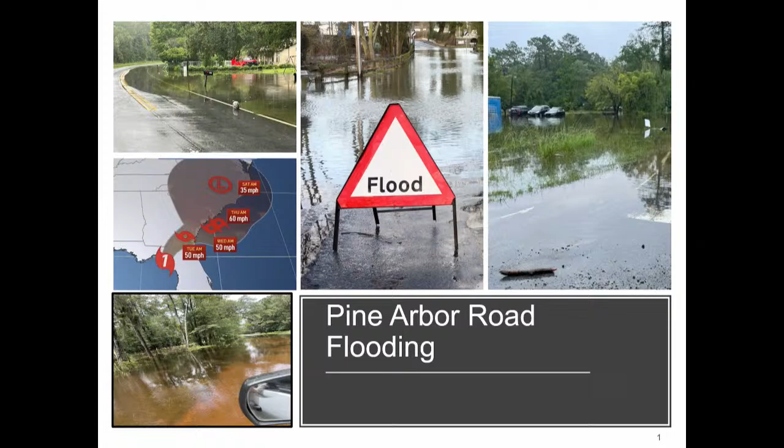So let's move on. Some key points here: already mentioned Tropical Storm Debby. About 1.3 miles of Pine Arbor Road was affected. We see about 3 different areas of concern that we're going to really start focusing in on. You can see what we found as far as how much rain actually fell over 4 days. It says 12 inches, but most of that fell the first night, about 9 inches of rain. If you look at NOAA's information there, that range right there gives you about a 24-hour storm, a 100-year storm over 24 hours, and so we're right in that, maybe a little bit less. So somewhere between a 50 and 100-year storm, I think, is what we experienced.

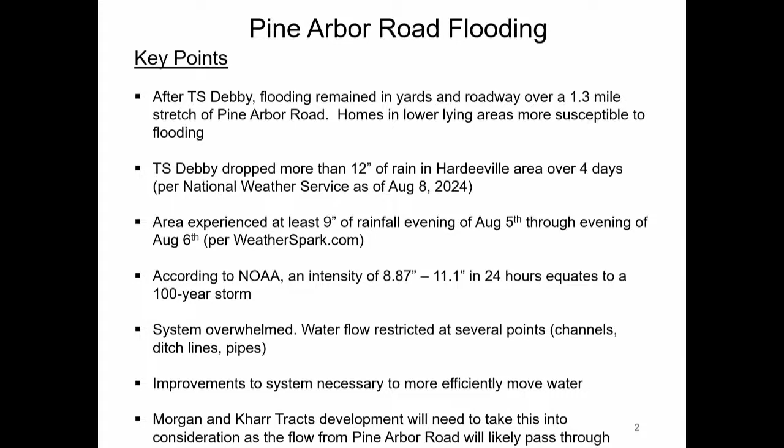System's overwhelmed out there, obviously overwhelmed. Water flow restricted in different areas. Improvements are definitely necessary. And the Morgan tract as well as the Kharr tract development are going to need to consider this as they move forward with their developments as well. Please stop me if any questions come up.

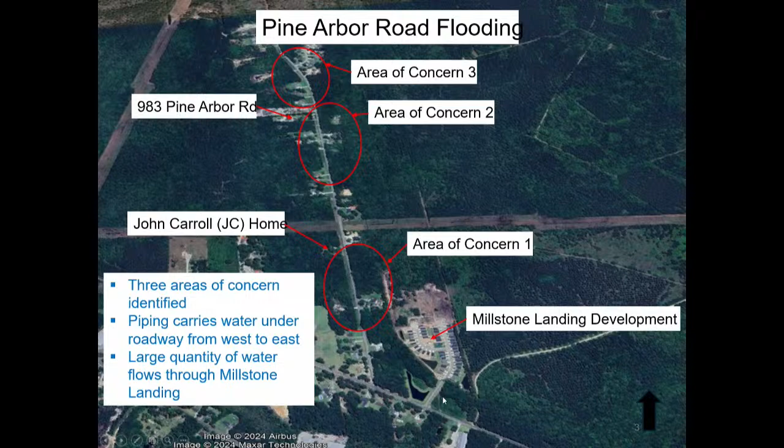All right, so again, we mentioned 3 areas of concern. I've got them listed out here for you. I've got 2 points of reference. One is John Carroll's house. From this point on, it'll be JC Home, and the other one is the Coolers residence, 983 Pine Arbor Road. By the way, I had a really good conversation with Ms. Cooler, but as we were getting all this pulled together, she gave me some really good information, and so I do appreciate that, and we're going to stay in touch with her, that family, as we move forward. I'm also showing the Millstone Landing development here, and that's going to come into play here in just a second.

All right, so let's look at Area 1. Again, JC's home, you see where that's located. You see Millstone Landing. What I've got here now is a choke point. I call out a choke point, which is right here. It's the entrance road moving into the Millstone Landing area. We're going to talk a little bit more about that here in a second. I've got 2 large X's here. These are the highest elevation points around. It creates a trough where water flows between the 2, right straight down to the choke point.

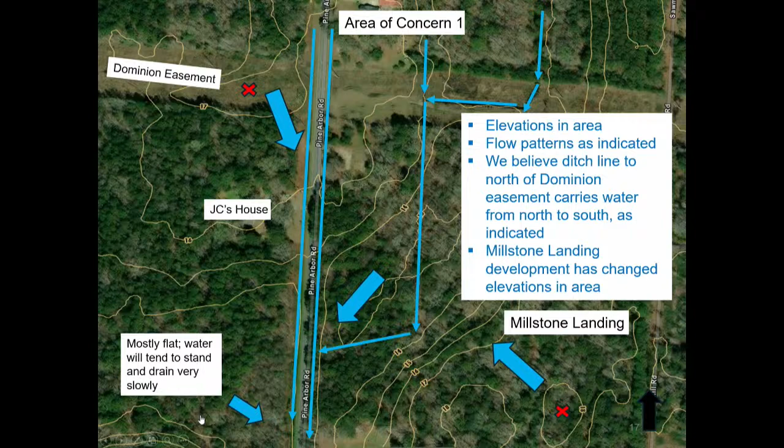I'm going to click to another slide real quick. This gives you a little bit more in-depth information on the flow. So the large blue arrows basically show the general flow of water in the area, stormwater flow. The smaller, thinner blue arrows indicate channel flow as far as the ditches down the roadway. And you can see other areas if you look up in here, there are ditches that are bringing water from the north to south, that go through that choke point.

So if I go back to this one here, again, that choke point is going to be vital, this right here, as we move forward in this brief. Oop, hang on. Move on there. I don't get to go to the next slide. I've got this link.

Because if I hit it right now, it will actually link to that slide I was just on. I needed to forward to the next slide. Can you just hit the arrow there for me? Okay, great. Thank you very much.

This brings it into more of a technical picture of the same area. Again, you see JC's home just above off the slide there.

What I'm showing here is there's the first of four 30-inch pipes that take water across Pine Arbor Road from west to east. This is the first one. It's picking up a lot of water on the west side of Pine Arbor, and it's moving it to the east, and it's also being joined by all this water up here that's coming down.

It comes down into this one ditch line right here. It literally makes a dog leg, 90 degree, and then it starts to meander down through this area into the choke point. What I show here is the choke point.

Three large 36-inch pipes that Millstone Landing put in. If you look at the numbers there, that's about roughly 21 square feet. That's what we're getting for flow that's going through that area. And again, a lot of flow is coming through this area.

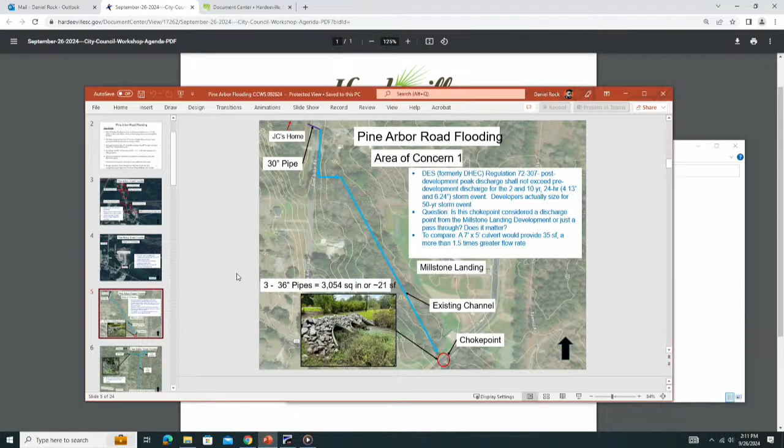Gonna bring the slide deck back up. But the water did go above the pipes, it did, but it did not go over the road itself. It was close, it didn't go over the road. It looks like even beyond those pipes it was up pretty high, flowing out on either side.

And this was just a tropical storm, right? It wasn't the hurricane, this was hurricane force. We didn't get the wind, we got the water. Is this considered a 100-year storm or 50?

I'll bring this back to you in a second. 100-year storms don't happen in every case. Was this considered a 100 or 50-year storm?

So again, if you look at the actual inches of rain over 24 hours that we got, what we can figure out is about 9 inches of rain. Typically for this area, if you look at NOAA, the average is about 10.1, but there's a range from 8.87 inches to 11.1 inches. Over 24 hours, that intensity would be considered a 100-year storm.

Yes, but we're at 9, so we're barely in that. So depending if the data is correct or not, it could be 50, it could be 100, but I'm saying it's 100. So that was considered about a 100-year storm? I think so, yes. And that was just a tropical storm, not a hurricane.

It was a tropical storm that sat on top of us. It didn't move, it sat on top of us. If it would have moved, I don't think we would have seen near the amount of rain that we actually got.

As far as when a developer comes in with their plans, they're scrutinized to make sure that is indeed happening. So these are based on theories from when? How old is all this information? Is it current or old and antiquated? No, this information is from myself and my team actually out there observing this.

No, we're out there observing what's going on right now. This choke point right here is fairly new. I don't know exactly what year it was built, but it's fairly new, within the last couple of years. I think it was 2019 when the plans actually got approved for phase 1, but as far as getting it actually constructed, I think it's been more recent than that.

Going back on what she was saying, the three pipes you're talking about, is that the city's responsibility to add another pipe, or make it bigger? Whose responsibility is that? That's the developer's, that's on Millstone Landing's property. We approved it, the city approved them to put that in there. That's part of the SRC process, is to approve that, right?

Now, could we go back to the developer and say, hey, we might like to talk to you about this, might need to take a look at it, because now we have the data from Debby that says maybe we need to look at this. But I don't know, since it didn't overflow the road, whether they would be agreeable on that. That's something we need to look at, but it's kind of a recommendation I'm making toward the end of the brief here.

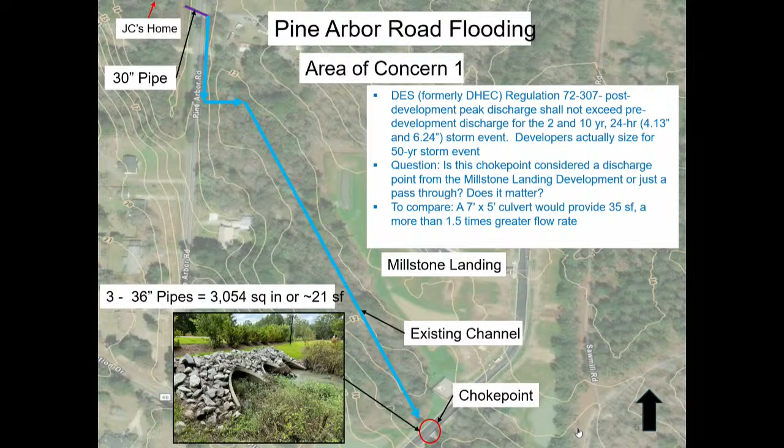Did their retention pond or any of that overflow with this? I did not see any of their retention ponds overflow. They got very high, I know one got high, but I never saw it overflow. The thing is, the way they've designed it, if they do overflow, they will overflow into this flow we're talking about right now.

And that could then create an issue where it's going over the road. Does that make sense, John? Yeah. As future development comes along on Pine Arbor, yes, developers are required through SRC to take care of their own stormwater, but there's always a percentage of it that's going to increase these flows, like this one here coming across Millstone Landing's property. What will happen if the day comes when those three pipes cannot handle the flow?

That's an interesting question. Let's back that up. Let's say upstream of that choke point there's another development, let's say Morgan or Kharr, actually downstream of that. Maybe they're adding something to this. It's up to Morgan to understand what the downstream effect would be by them adding something to it, and then they have to design their development to adjust for that.

To be honest, until I saw this handout stuff, I never thought about the Morgan tract, even though I should have, how it can affect this. I thought of it because talking to Ms. Cooler, John and I met with her, and John subsequently met with her again, and you've heard it over and over, people saying the developments, even from Margaritaville, are affecting this area, not only here but entirely through downtown. I'd have to rely on John what that effect is, but if that's true to any extent, Morgan's just going to add to that situation.

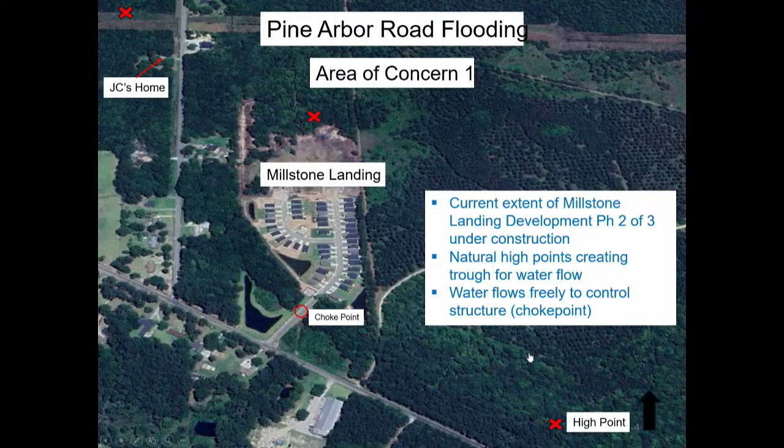I guess my point is Millstone Landing is approved for 600 homes, and right now what's there, a couple dozen? They haven't been engineered - just that first section has been engineered. We haven't moved past that wetland to the next area.

My only point is, as they continue to get built to that 600 home mark, it's going to continue to bring more impervious surfaces. But again, they have to control that - that developer can't release that off their site. Each section, every phase, they have to control it.

All right, let me move on. So we were here, this was the section we were just talking about. This is the southern portion of area of concern two. The large arrows show the general flow, the smaller, skinnier arrows show the channel flow. We also have the Buford Jasper pump station that sits right here. Outside of that, there's really not much in that area, so I'm going to advance on from there.

John made a point - it was overwhelmed and there were several houses on Buford Jasper that could not use their facility, it was overwhelmed. They couldn't control it either, and it's actually built up off the ground.

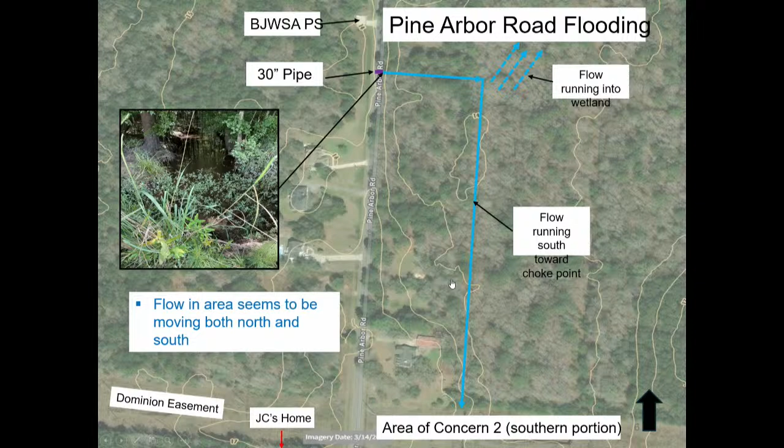Actually, if I could, can you play that other video for me?

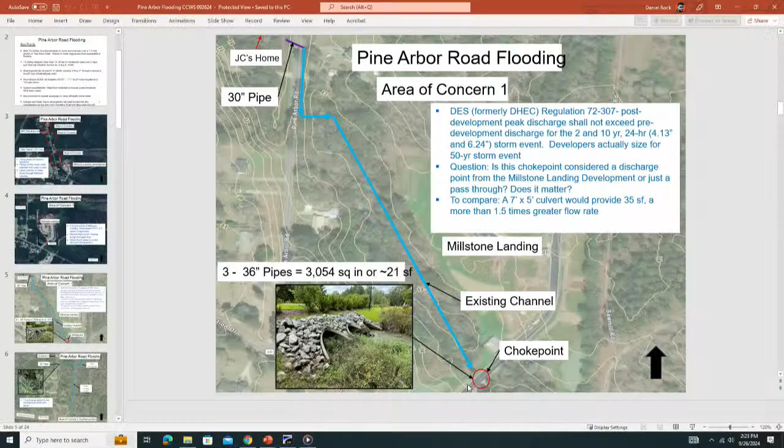This cooler provided a pretty good video showing what it looked like coming out of their driveway. That's looking south right there, and that's their yard. Then they drive all the way down showing you the flood.

Now, this should all be going into those ditches across Pine Arbor and then down towards the choke point. That's where this should be going. Look at this.

I'm going to talk about that in a second. Again, that's the worst I've ever seen it. But I've seen it before, up to these houses too. This isn't the first time it's been up to the doors. The house right before the pump station, I think, got hit the worst, because there's the pump station right there.

All right, you can stop it there. Let me get that back from you so I can do the link thing. Yeah, those homes, even with a lot less rain, it's been hit a couple of, two or three times.

All right, so as we continue on, again, the red circles show where the houses were at, and they really suffered. So as we move on from here, what we're seeing too is this very large house sitting just to the north of where the coolers live. There's some development happening back here. I don't know exactly what it is because I haven't been able to get back there, but we think it might be affecting some flow.

If you look at this slide, you'll see where 983 PAR is located right here, and here's that big house. This natural flow channel, I think, is getting affected by something going on here. I can't figure it out yet, but that's supposed to pick up water and take it out of the area. This slide also shows you where the wetlands sit in that general area, that's the lighter green you can see there. And then down below, you can see where the choke point's at right here.

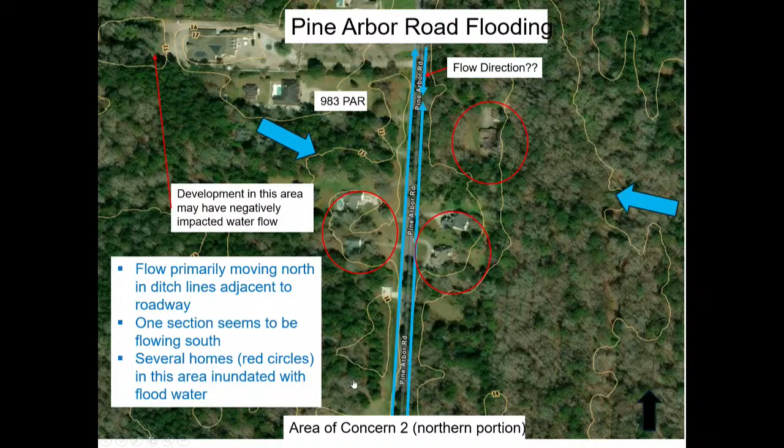Brenda, is that our friend that we've had? Yes, I believe so from what I can tell, and it's hard for me to tell. We're gonna keep moving on this. I'm gonna go to the next slide, which is gonna stay in the same general area.

Now, here's where we're talking about, you see 983 Par, which is the cooler's house. Right in front of them is another, this is the third pipe that takes water from west to east. Here is a big issue. Here's the inlet to that pipe. I can't even see the end of the pipe.

All right, so we're gonna have to do some work on that. We're gonna have to talk to those folks out there as to how they can help us keep their ditch lines clear, because I think what's happening is we might have landscape work going on out there, and a lot of that's getting pushed into the ditch lines, and that eventually is gonna cause it to clog.

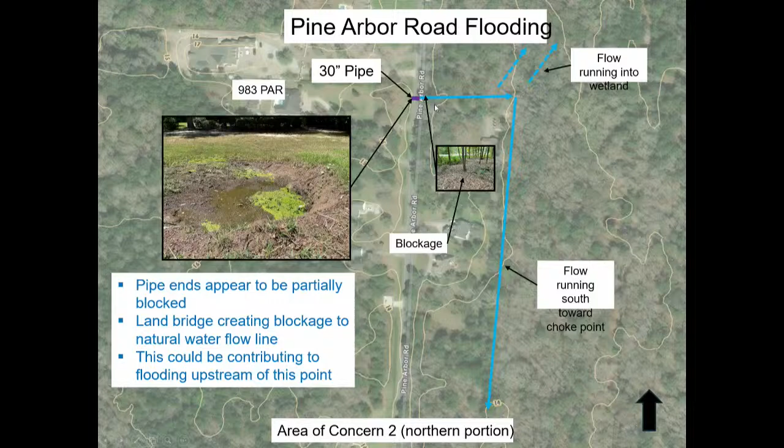On the other side of the road, on the east side, this house actually built what I'm calling a land bridge. It's like a diversion, so that he didn't want water coming across the road and into his yard. It should flow freely down this ditch line and then south down this ditch line. But since there was something built here, it's diverting flow to the north, and that's what I'm going to show you on this next slide.

Here's a closer up picture of that. Here's the pipe I just discussed with you, and there's another pipe right there I'll talk about in a second. But this 30-inch pipe should be picking up water, comes across, it's hitting this man-made dam, this diversion, and it's wanting to go north, okay.

Instead of it going its natural flow pattern past this house and then south from that house, it's actually diverting it north. I think that is a huge problem that we're having because it's not allowing the water to flow in the way it wants to flow. Water wants to flow downhill, it wants to flow its natural path.

What we're having here is the water's coming through, it's going north, and then it's competing against another flow. I think that is a huge blockage that we're having, and that's where my folks are gonna start taking a look at that, is how we can do some work.

Now, on the 9th of September, I went out there and I stood on that second pipe. I stood on this pipe right here, and I looked south. This is what I saw. I turned around and looked north, that's what I saw.

You can see a clear difference. Water's not flowing there. There's a reason for that. Something's blocking those pipes up.

Is that land bridge on public right of way? It is not, I believe. That's a great question, because you gotta think, if we put a pipe here and there's a ditch there, that should be right of way that the city owns. That's what you would think. That's what I'm thinking. That should be, and we should be able to get out there and remove that. I think we should do that anyway, to say, hey, we need this water to flow the way it's supposed to flow.

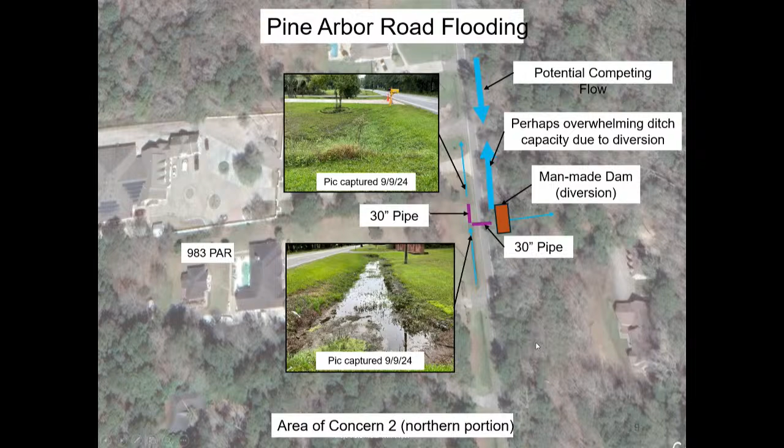As we move on, we're up to the fourth pipe that takes water from the west to the east. That's this one right here. This is up at the Heritage Place community, right up the road a little ways. This isn't so much a problem in itself because this is kind of high land, so water's running off of this towards the north and the south. But water that does flow across Pine Arbor, it's in the channel, then goes into some underground piping, back into a channel, into this retention pond. This retention pond's built so that when it fills to capacity, there's a weir that allows water to flow out of that, and that water flows down south.

Where does that water go? Choke point, right? So the point I'm trying to make is there's a lot of flow coming south to that choke point. And as these new developments come out, they're gonna have to take a look at that and see what can be done.

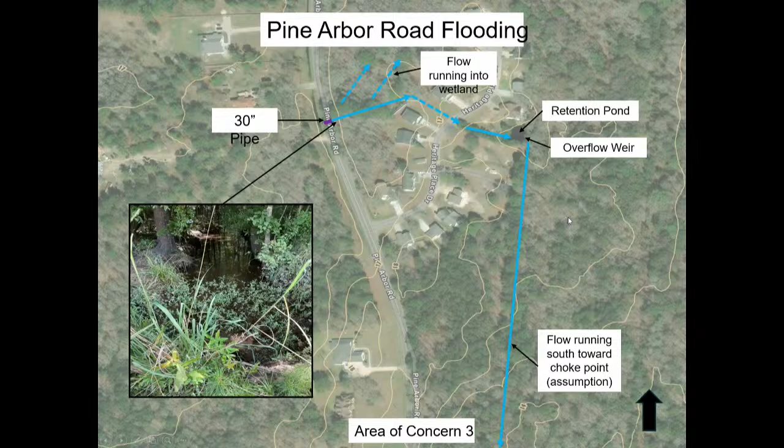So with all these developments coming up in the area, and we're noticing because of the impervious surfaces that those developments are creating, why can't we up the ante on them and have things change where it's improved instead of us leaving it the way it is right now? Can we do that?

May I? Yeah, absolutely. One of the things is, like that situation where the man-made dam was, that's not in a development. That's some homeowner that just decided to do that, to block off.

Yeah, no, I'm not talking about that. I'm talking about developments in general. We have to, instead of it going, okay, three of those are going to be okay over here, think of the future going forward, they say less is more. I am always a more-is-better kind of person. So can we not have them do something better than what they are doing now? Because that's what we expect, to do much better than what has been done.

Our ordinances—most of this development out here, like Heritage Place and all that, came in well before our regulations. It was before I was here. So with what's happening now, I don't know all the engineering words or details, but I know Millstone, by putting those pipes in, we're doing exactly what they should have done. And you need to figure out the choke point, how water's getting down to it, if I'm understanding correctly.

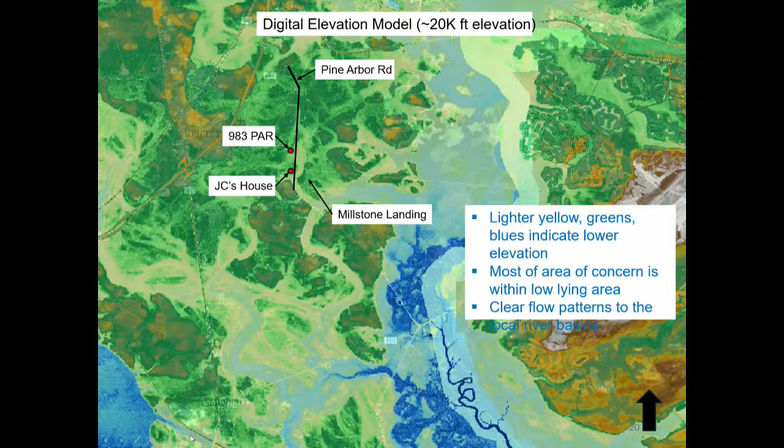Here's a few recommendations that we came up with, short term, say six months. This is us, Public Works Department getting out there, clearing the excess vegetation, pipes at all the crossings that we have out there. Clear the identified blockages, that's that dam I'm talking about, that we need to get out there and talk to those owners and say, hey, we're gonna be coming on your land, perhaps, taking care of this. And then educating the residents. I think there is an opportunity to educate residents on how to help us keep those ditch lines clear.

All right, looking out, say, to 18 months, check and correct the drainage elevations. I think we have some issues because I'm seeing competing flows out there in a ditch line where two flows are coming head to head. That's not helping us. We need them to flow in the right directions.

Install additional piping perhaps under the roadway to help move more water. And then looking out past that, construct new channels. I'm gonna talk about that here in a second. Replace some piping and make it into a box culvert, if you will, if that's what our engineers say needs to happen. So any questions on that? John,

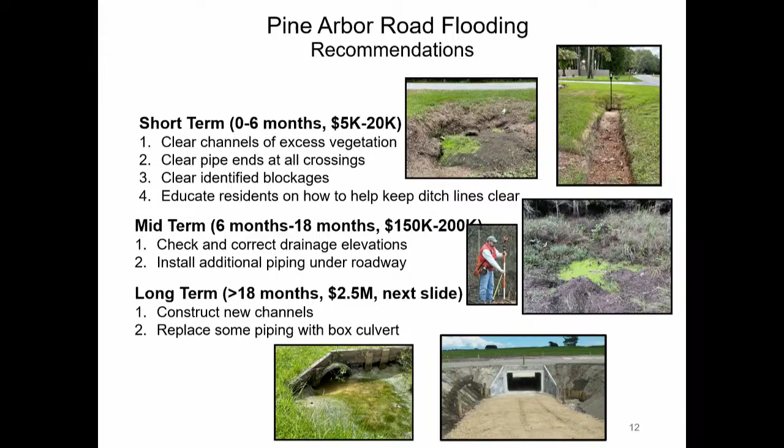If we, cost aside, because we don't know what that would be, but if we outsource this, could we accelerate these timetables? Perhaps, absolutely. Absolutely, but let me show you the next slide, which talks about maybe outsourcing. Well, we would have to outsource it, but the next slide, where is my? There we go. Oop, didn't want to do that. Next slide.

Thomas and Hutton was hired to do a comprehensive stormwater plan for us. Let's take a look at that. This is literally one that came right out of that plan, Pine Arbor Road. Again, you can see JC's house. So this is now not north-south, it's more west to east here, the way we're looking at this.

Thomas and Hutton had a great idea: let's build a new channel. And now here, let's replace this pipe right here, which was the first pipe we talked about, with a culvert for increased flow. The issue with that is, if you look down at the bottom right, it's $1.7 million for that project.

Now, two years ago, how much is it now? More than two million probably, likely, to do that same type of work. So it's not that things haven't already been thought through to say, how can we make this work a little bit better? Now it comes down to, what do we want to do, and are we truly committed to put the money towards it to get it done?

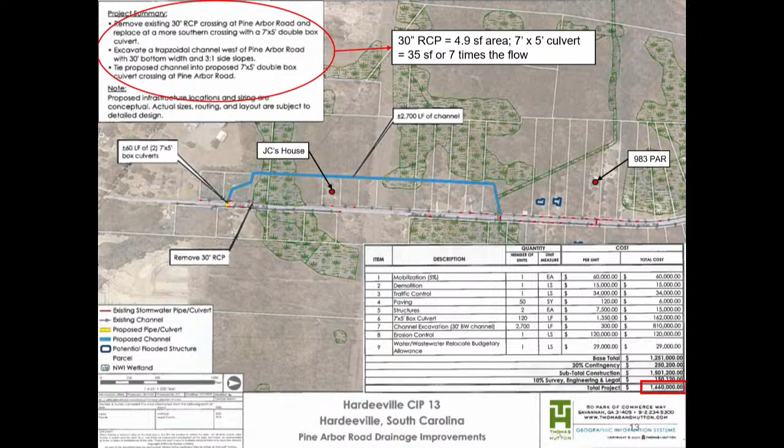There's some backup slides I don't need to go to, unless there's any more conversation you want to have, but that's where we're at right now. So it would seem to be one of the short-term solutions.

Easing things is get code enforcement to blow up that dam. Just burn it. Burn it. Or either we're gonna get our new piece of equipment. I'll take the pictures as you do. Our new excavator, we'll take care of it.

First thing is to find out if we have a legal foot to stand on. I want to push the... well, we can look and see exactly where it is. There are some houses out in the county. Is that one in the county? No, that's actually in the city. Yeah, there's only two along this whole stretch that are actually in the county. Do some investigation, who owns that? I don't know. In all seriousness, it's happening. Say, Mr. So-and-so, tear down that wall.

Nathan, excuse me, I want to try to help out a little bit. We haven't fully vetted this application to see what the zoning districts allow, because what we will be asking from you is a straight zoning district. So we have to see exactly what the ordinance says and play out how, but the staff has not fully reviewed all of this at this point. So I just want to let you know that before you get into all the details of the parking.

Okay, yes, thank you. Because my question, I really believe, is valid. I mean, you have 13, 14 offices here. Parking is going to be a problem. Unless only one person is in those offices, and then you have the residential, parking is going to be an issue no matter what, and you're gonna have to address it. You're absolutely going to have to address it.

Your office spaces that you're looking into, what are we talking? Insurance people, what are we talking? No, these are nonprofits and federal and state agencies geared toward low-income residents, so it can be a one-stop shop where they can come to one place and access all the agencies to help with low-income housing needs.

Well, that's great, but those people aren't gonna walk there. And this is why parking has to be addressed. We're debating with all the parking in that whole area down there around the hub, and unless we can address this, we're just gonna shove parking from one place to the other. We see it now, parking at the library when something's going on over at the Mission. We have to address it.

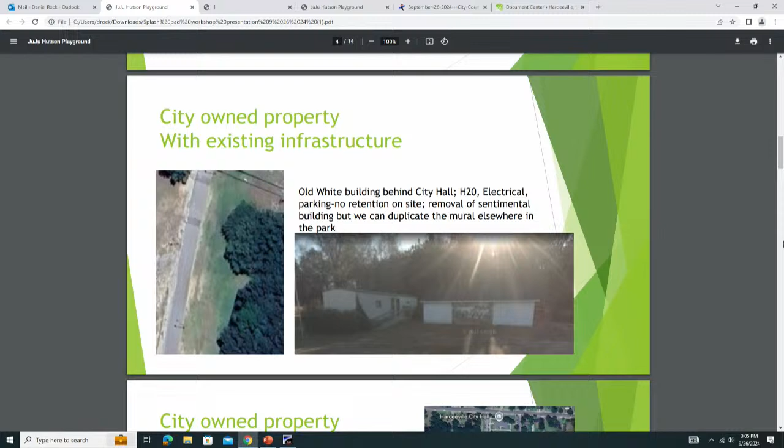This is where all of our playground stuff is, which we're getting ready to finish up. I know Jody's working on all that right now as we speak to finish up the Juju Playground Park and getting all that done. The one thing we have a problem with down here, JB was just talking about, is all that infrastructure issues with BJWSA.

We do have retention ponds out here again, but there are different areas that are already spoken for. The parking lot, Juju, is already done. We're literally going to be putting that out, getting it done hopefully within the next few weeks and get that contract signed. And then we're adding the parking.

I would honestly say that anyone who has been here for the last couple of years understands and knows, it's been out to the complex to see - parking is a huge issue. They'll park any which way. So we are addressing those needs.

And we do have the parking lot improvements, which also includes part of Randall Street on the other side. So we're taking care of all that stuff.

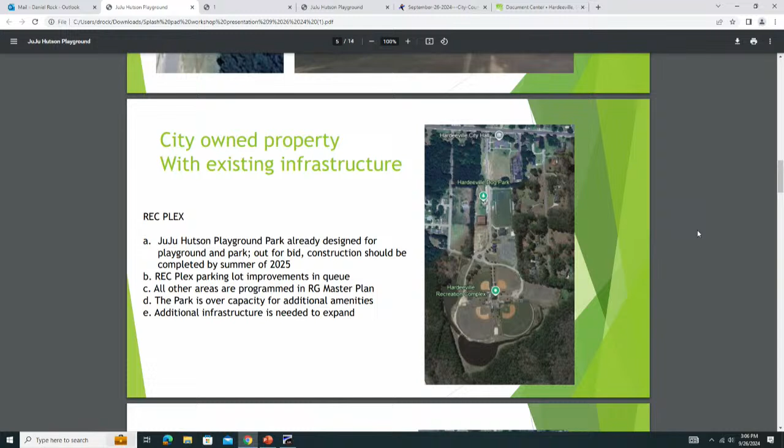In a perfect world, it would be great to add it. We just don't know where we'd be able to put it without taking something that we already have in the queue that's already master planned and literally out for bid.

So this is inside of the complex, just kind of on the outside - we don't think about it. This is again city-owned property without any existing infrastructure. This is the old dog park. This is actually where the playground used to be many, many, many moons ago. And people still use it.

It's a beautiful area. We will have parking, it's going to be across the street, right at the Randall lot that the city purchased a while ago. And we do have a detention and retention pond that is out there. But again, we don't have access to everything else without additional costs to connect into BJWSA and electrical and so on.

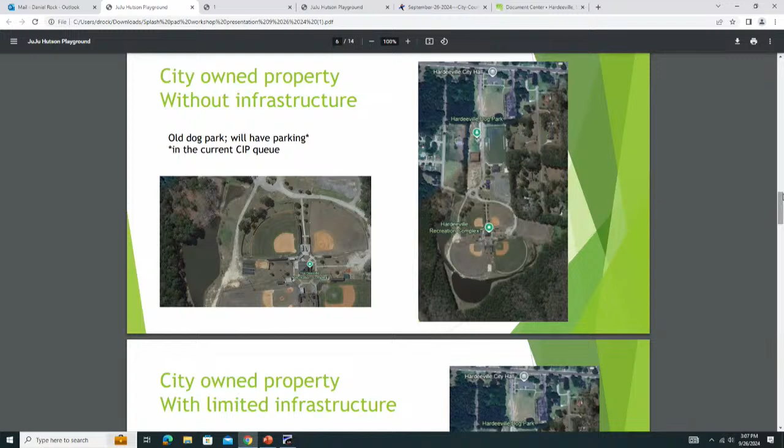And then we kind of come down here, same thing. This is the old JuJu Hutson Old Homestead, which is literally - let's see, yeah, I'm gonna do that one. This one's not going to work either.

But anyway, it's literally right up at the corner, and I don't know which clicker it is, I'm not used to using that one, sorry. But it is this little lot that's right here. So it's a pretty small lot.

Again, we will have some additional parking, but we also were concerned with what's going on behind City Hall in the future. There are plans to put in an annex, which is where we have our festival and all that kind of stuff, so a lot of that will have to be moved. We'll have to find another area to do that once the annex goes in. And I'm assuming probably the majority of that is going to turn into some parking at some point, because all of you here right now, whether you're staff or not, there's nowhere to park.

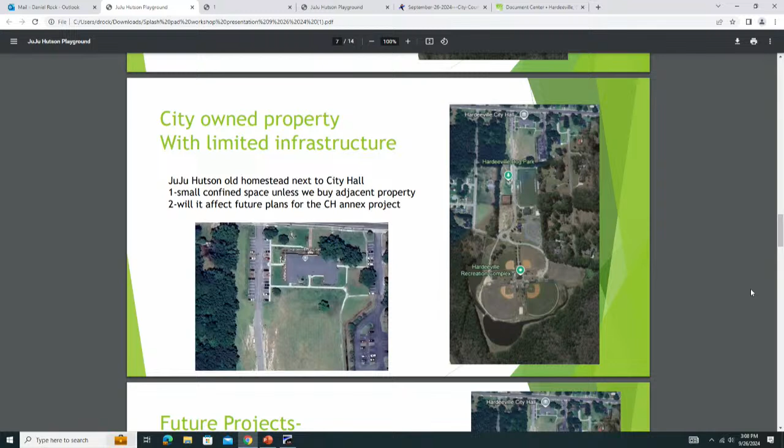So that is another area that we looked at. And then again, moving down, we looked at a lot of the future projects.

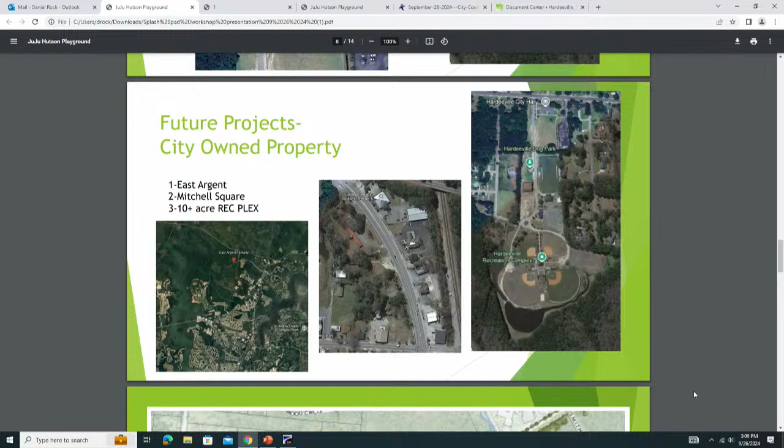City-owned property, of course, we looked at East Argent. East Argent is a wonderful area, but our directive was to try and find something now that we could use. East Argent could be another year and a half, maybe 2 before the road is finally finished. Mitchell Square, the city just acquired that property, but again, future plans are in the works for that. And then we also have our 10+ acre property right along I-95, over where the old dog park was. A lot of people don't even think about it, but it is there. There's just no way to get back there at this point without adding a hefty bill for some roads and stuff to get back there.

So, this is just kind of a quick synopsis, because most people would say this is probably the best place to put it. But again, I guess this is a hard pass for me, but it's up to council.

One of the things that Parks and Recreation wants to do, and the city, we're growing in leaps and bounds, and we want to be able to expand. I always joke with council, we have one playground, 57 square miles, one playground, which means everybody is using this park, and we're not expanding our parks to other areas so that people can get access to it. So, this is what we own. This is the land that we own.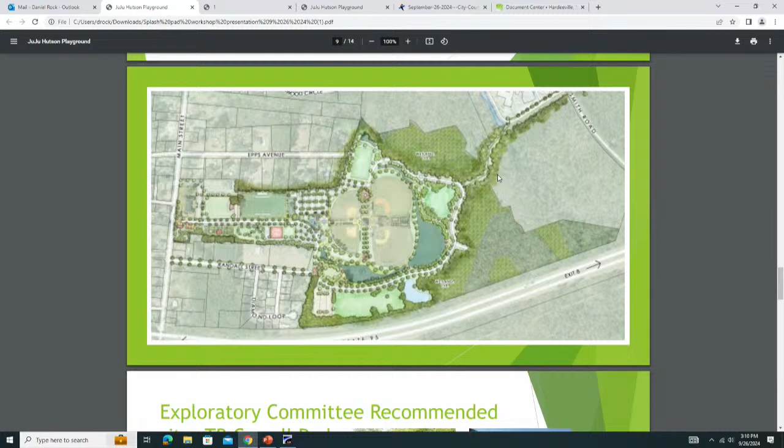And then after a lot of going back and forth, this is what we recommended. We recommended TB Carroll Park. TB Carroll Park is literally centrally located inside the city. It definitely needs an upgrade. We looked at the train, trying to figure out all the different kinds of things and elements that we could tie into it. We've got the hub that's going to be going in there as well. There will be Veterans Park, not on this side, but on the opposite side. So you've got a lot of different things to bring people to this area.

And then the general cost, again council, please be reminded that this is just a snapshot. We are not giving you a budget and saying this is exactly what it's going to be. Jody will tell you, we're not going to get into the weeds because the weeds are very expensive. But there are considerations that we definitely need to think about. So obviously we looked at land. If we don't need the land, we can take that money out.

The design, build, engineering right now could be anywhere between 12,000 to 15. What I always do is I put that higher number on the back end of it just to help with the contingencies. We did have a meeting yesterday with Vortex. Vortex doesn't charge for their design fees, so it does help with the city as well. Permitting can be anywhere between 15 to 18, depending. Again, there's contingency that's built in.